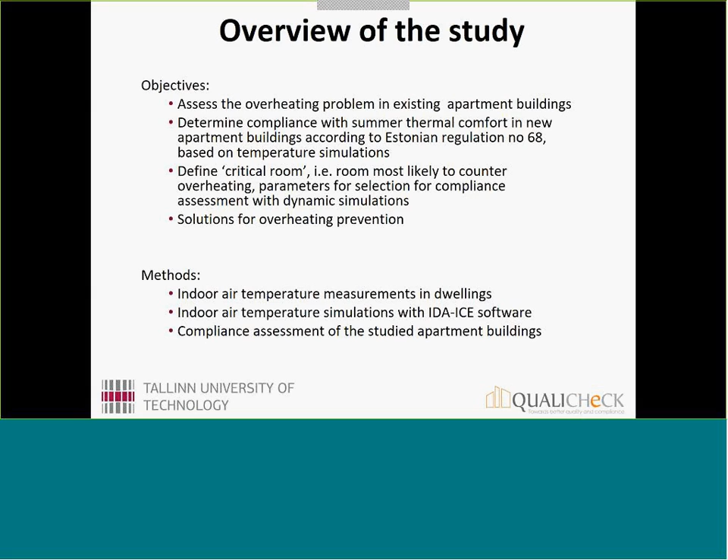So first, the objectives of the study were to assess the overheating problem in existing apartment buildings. We conducted indoor temperature measurements for that in the year 2014. Then to determine the compliance of these analyzed buildings according to Estonian regulations, and also to define a critical room that is most likely to encounter overheating, the parameters that define this room, and to get some solutions that are practical and good for overheating prevention.

So the annex requires that overheating prevention is a priority, and it is also included in Estonian legislation. The requirement is in degree hours. In case of residential buildings, we have a limit of 150 degree hours over a base room temperature of 27 degrees. And in case of non-residential buildings, we have 100 degree hours over the base temperature of 25 degrees. And this assessment is done during the period of 1st of June till 31st of August during the summertime.

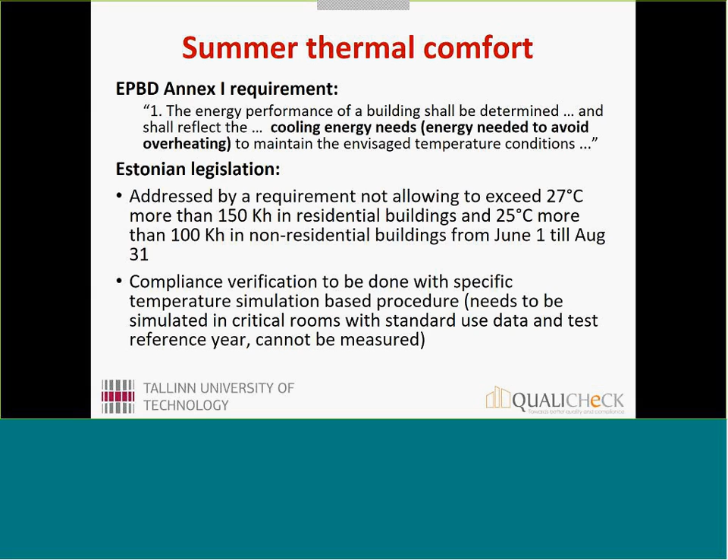And usually in non-residential buildings, we have mechanical cooling installed, so this means that there is no need for this specific assessment for these buildings. For this, we conduct the simulation-based procedure where some critical rooms need to be simulated and verified.

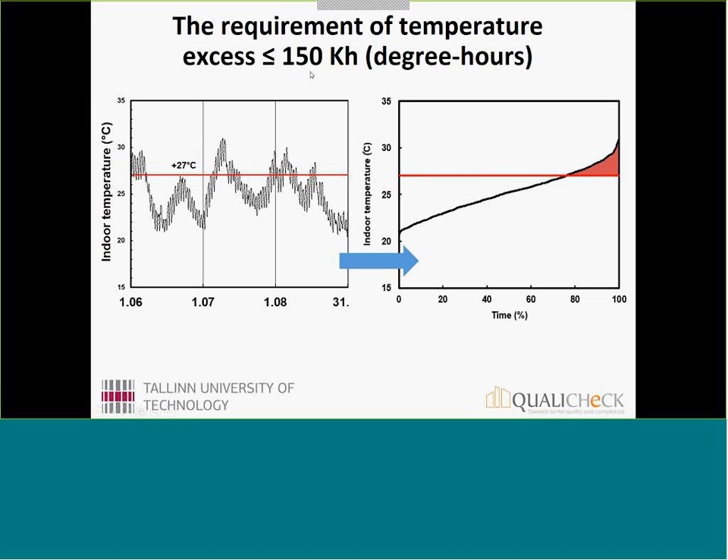A bit more about this requirement of degree hours. Perhaps some of you do not know this, but I will just briefly explain it. So, for example, in this case, we have simulated this 3-month period indoor temperature in one room, and every hour that the temperature is over plus 27 degrees in case of residential buildings is summed into degree hours, and it must not exceed 150. Basically, to calculate it, every hour we have some temperature value. If it's 27 degrees, we get excess 0. If it's over, we get some excess, and we sum these, and if the sum is higher than 150, then the building is non-compliant.

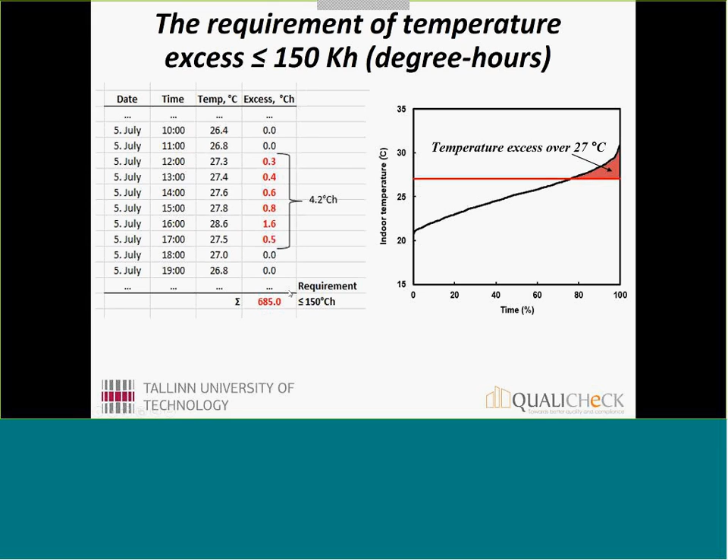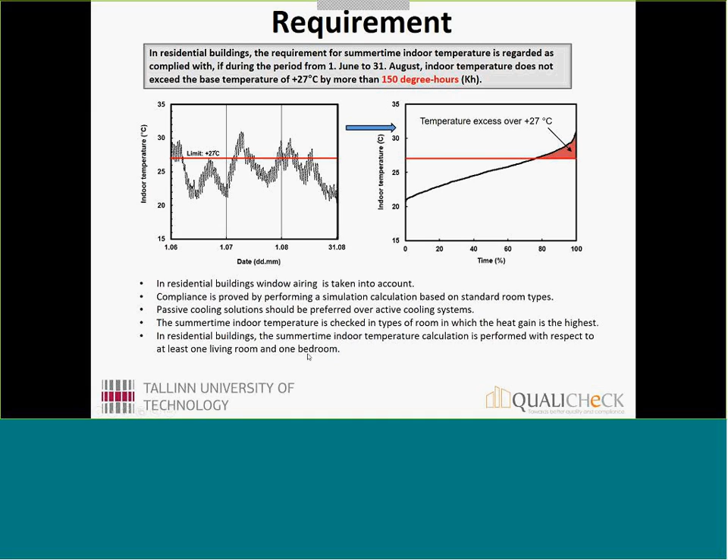And compared to non-residential buildings, there is a key difference in terms of ventilative cooling through window airing. So we can count this in residential buildings, and it needs to be simulated as well. So as I said, the compliance is proved by performing a simulation-based calculation for standard room types, and usually passive cooling solutions are preferred over active cooling systems, especially in residential buildings. Rooms in which the internal heat gains are highest basically need to be simulated. In residential buildings, this calculation is performed in at least one living room and one bedroom. So at least 2 rooms need to be simulated.

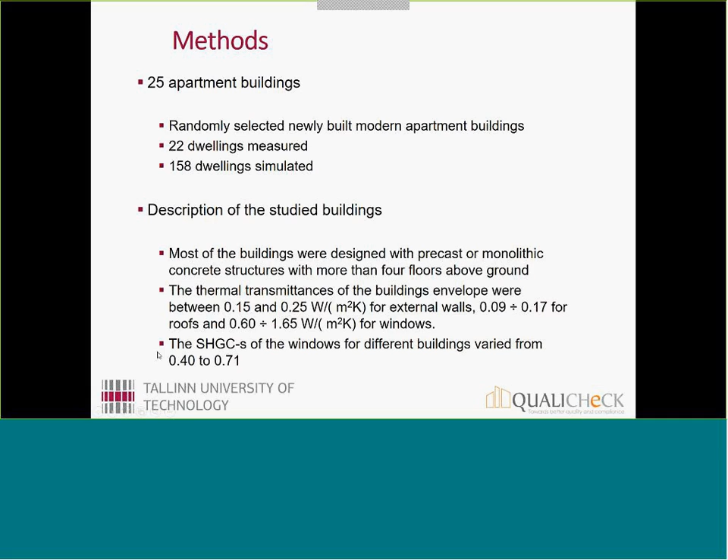We analyzed 25 apartment buildings. We selected them randomly, and the requirement was set in place in 2009. So all buildings that acquired the building permit after that were chosen for the study. These buildings need to have these calculations in order to get the building permit. And we conducted measurements in 22 dwellings and simulated altogether 158 dwellings. Most of the studied buildings were massive precast or monolithic concrete structured buildings with usually more than 4 floors above ground. Also some transmittances for the building envelope are shown, and a quite important value for the windows, the solar heat gain coefficient, varied from 0.4 to 0.7.

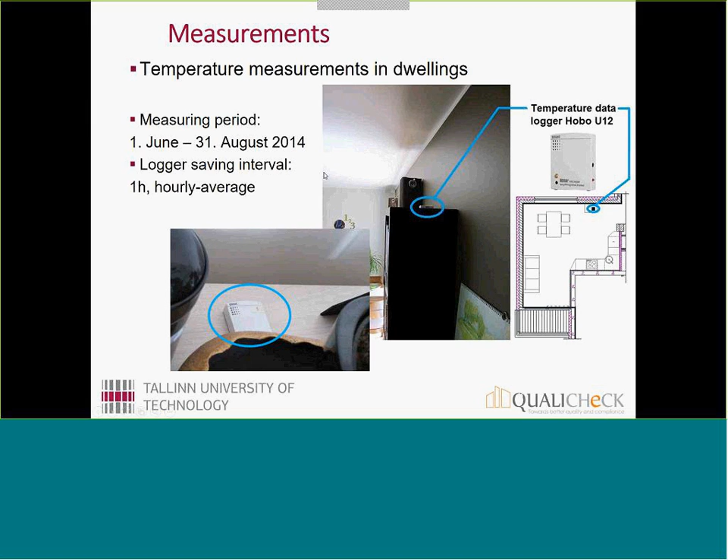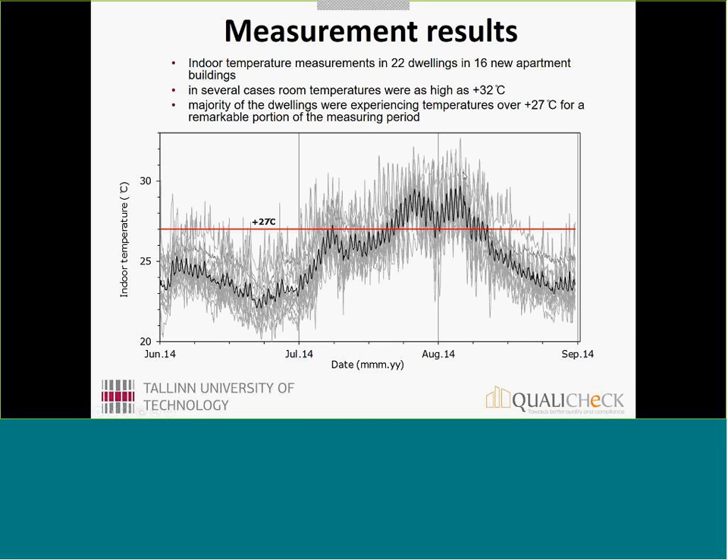And here the temperature excess for the measured buildings, and here you can see that if we could take the 150 line, then most of these would exceed this line. However, we have to acknowledge this is the measured year, and the year of simulations is quite different.

So the highest was 2,110 Kelvin hours, and it had large unshaded windows and was west oriented, and also no cross ventilation in this case was available. So this was a quite overheated apartment.

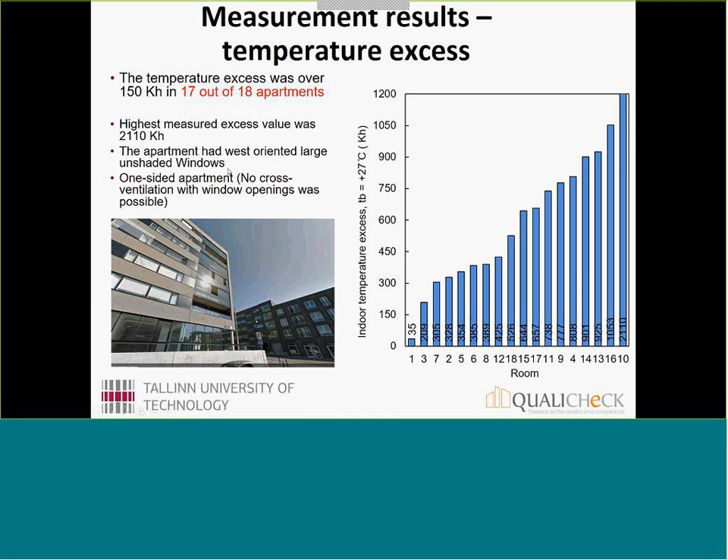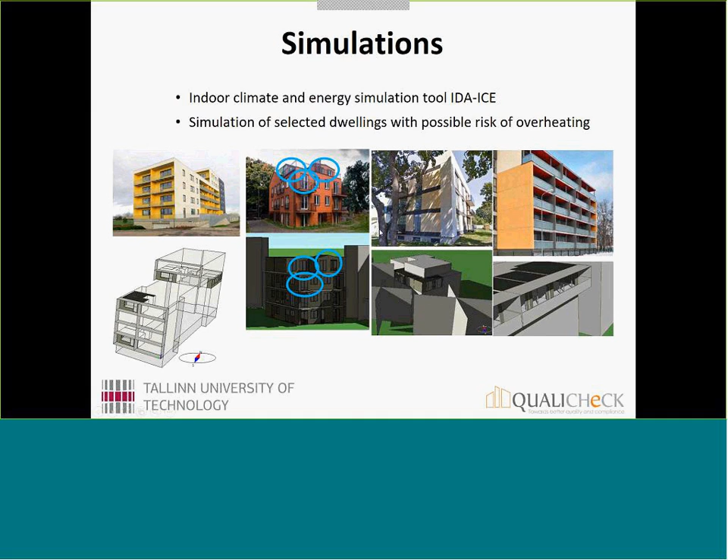As already mentioned, the simulations were done for specific apartments. Rooms that were south or west facing with relatively large glazing areas, for example. Not the whole building was simulated, but these, so to say, critical rooms only, and also all shading of neighboring buildings or trees was removed.

Simulations needed to be done using the Estonian test reference year climate. This represents a typical outdoor climate of 3 decades in Estonia. It contains hourly average data of outdoor temperature, relative humidity, wind speeds, and solar radiation.

And if we compare the summertime period of this test reference year to this measured period of 2014, we see that only its outdoor temperature excess exceeds this 150 degree hours, and in case of TRY, it's only 0.5. So a big difference between this year and the real year.

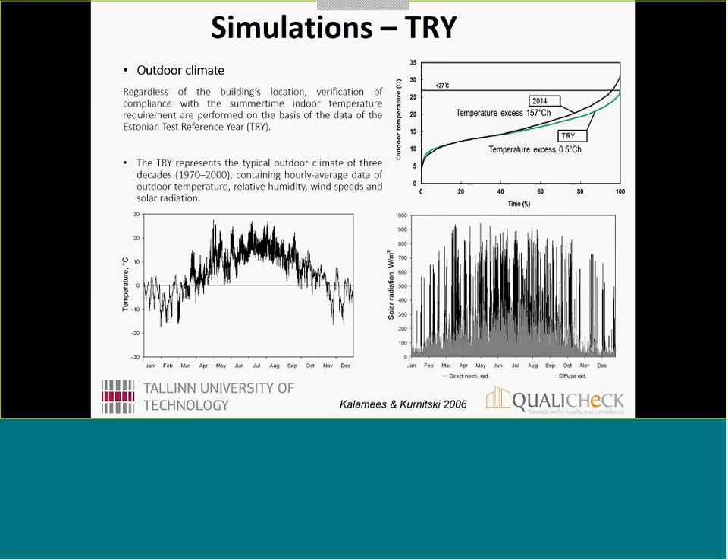In this, simulations need to be done using standard use profiles for lighting, power, appliances, occupancy, and the internal gains from these are presented in this graph as a sum. So the building is operated 24/7. So these standard profiles are for every room and need to be used with standard profiles.

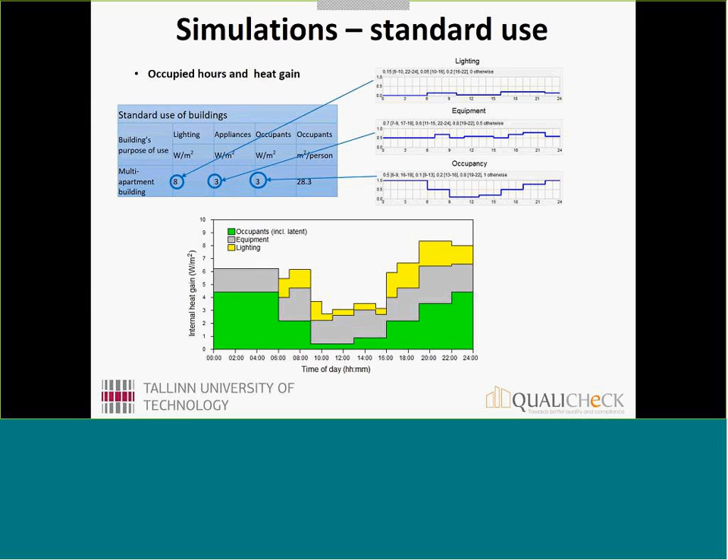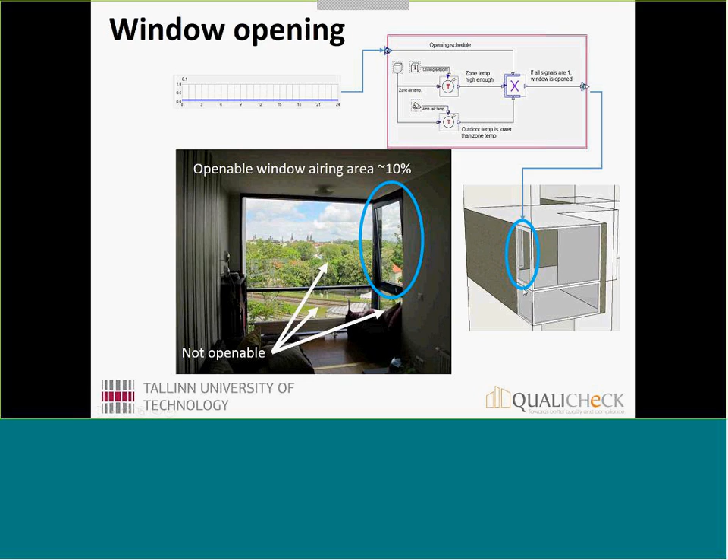Window opening is a difference between residential and non-residential buildings. So we need to look at design drawings, where there is information about whether or not the window is openable, and we have to then calculate the openable window airing area, and this needs to be included in the simulation with an algorithm: for example, if the zone temperature is high enough and outdoor temperature is low enough, we can use window airing, and in this case 10% of the total area is used.

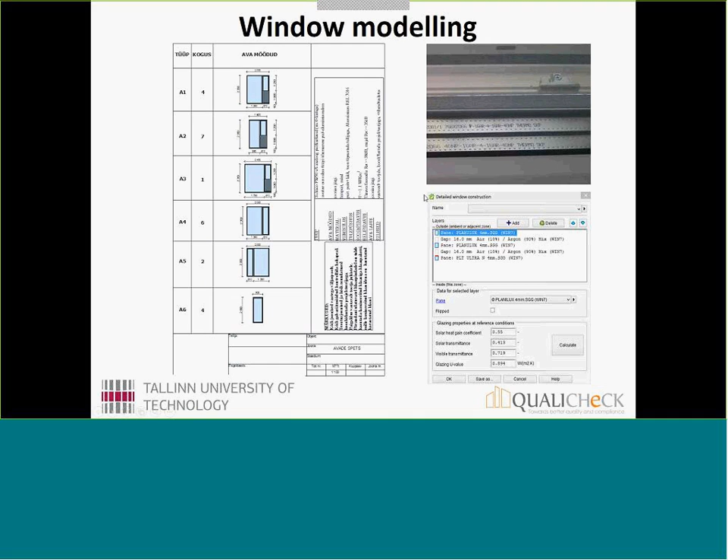And also from the design documentation, we get details for window panes with specific values, and these also need to be included in the simulation accordingly.

And results: of the analyzed 25 buildings, we saw that 68% did not comply with the regulation, and as you can see, some of these buildings are near this 150 degree hour limit mark, but some of them are heavily over this limit. So really, if this is not met, the building permit should not be given to this building.

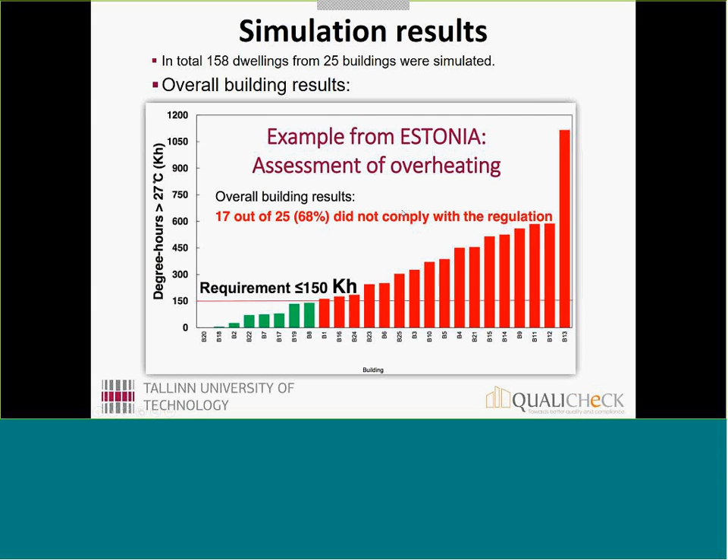Yes, this is a relatively new building code. We could see that this requirement was not fully established in practice. Only in 8 buildings were the required calculations included in the building permit documentation.

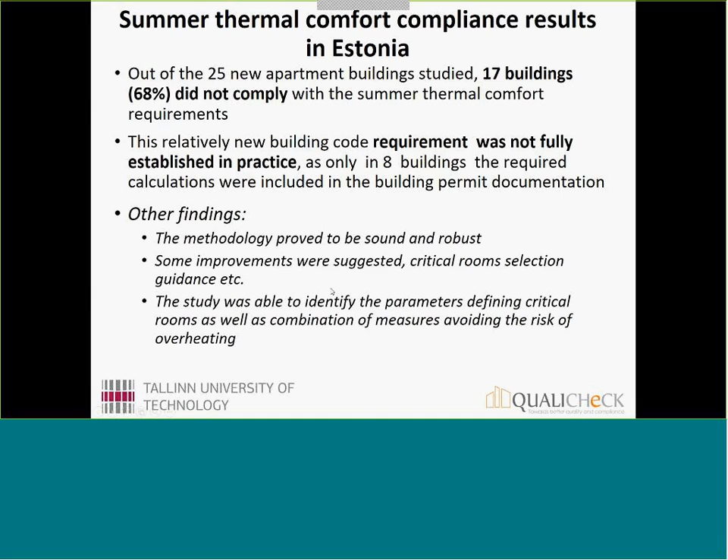And for findings, the methodology itself proved to be sound and robust. Some improvements were suggested in terms of critical room selection guidance and so on. And the study was able to identify the parameters that define these critical rooms as well as a combination of different measures for avoiding the risk of overheating.

And for conclusions, temperature measurements showed that there is high risk of overheating in new apartment buildings. There were also many complaints from occupants, but we didn't have this data systematically. And 68% of the studied buildings did not comply with the requirements in Estonia.

And we cannot directly compare the simulated and measured results because of differences in weather data and occupancy behavior and so on. But we know that shading balconies had a high effect on overheating risk reduction.

And we find this critical room is usually a combination of different factors such as southwest oriented windows, lack of external shading elements, and well-defined window-to-wall ratio values, and window-to-wall ratio multiplied with solar heat gain coefficients. And also a major factor was window airing area.